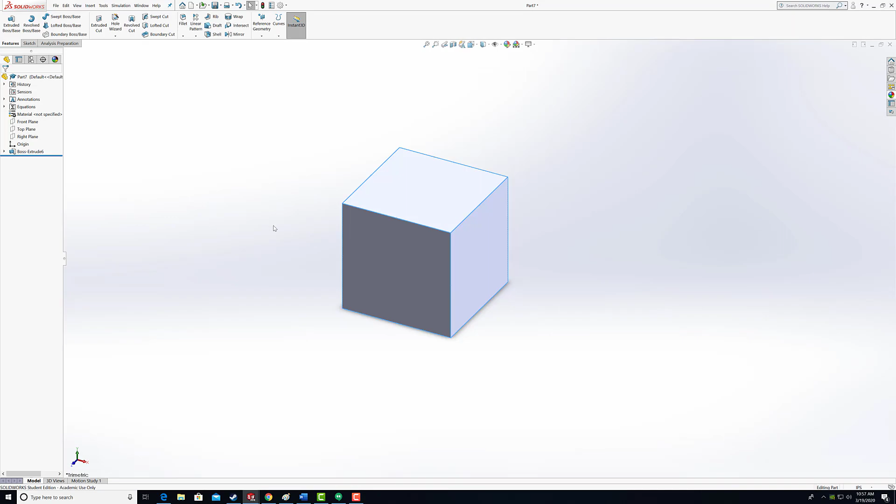Now, as we look at our cube, we need the ability to visualize our end goal, which in this case is a keychain with our name on it. We could go about this a few different ways. We could delete this cube and start from scratch, or a quicker and arguably easier way is to just edit our pre-existing features.

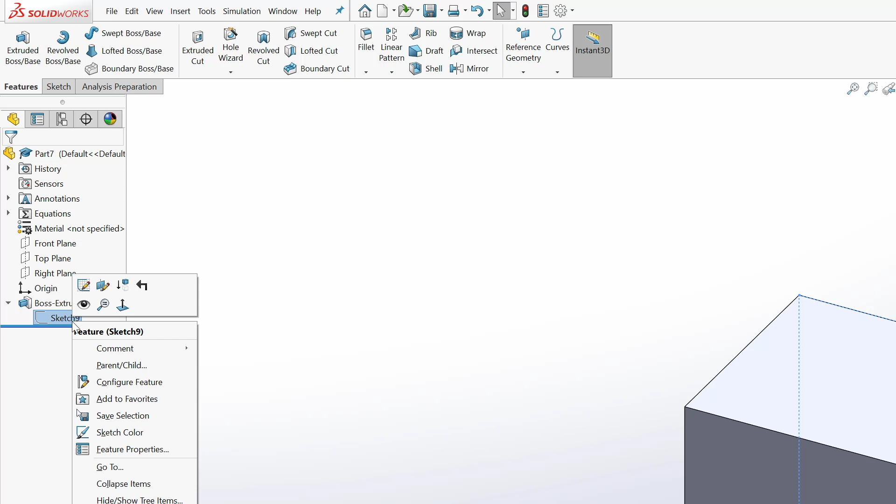To do this, head over to our Boss Extrude in the tree. Remember, we can see all of our sketches and 3D objects within the tree. Clicking the arrow next to the 3D object reveals the corresponding sketch. Right-click the sketch option and click Edit Sketch. Now feel free to hit the space bar, then select Normal To. This brings our view to whichever plane or surface we are currently working on.

Double click on our dimensions to the left, which is our width, and place 2 inches. Now double click our length dimension and enter the new dimension of 5.

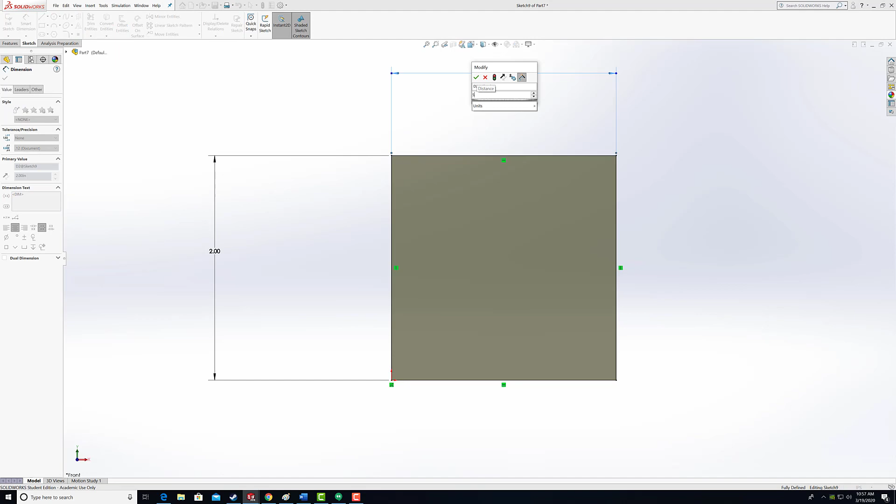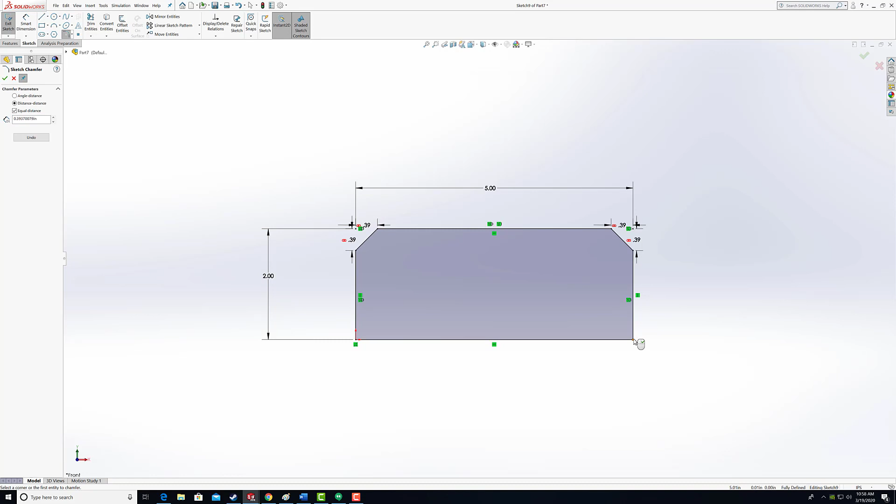Before we leave our sketch, let's add a few chamfers, just to add some interesting geometry. Go up to your sketch tab, and next to the fillet tool you will see an arrow. Let's click that. This reveals the chamfer tool. With the chamfer tool selected, select all the points of our rectangle. Once we are done selecting our 4 points, we can go ahead and click the green check mark.

Perfect. Now you guys can see just by editing this sketch that our original sketch compared to our new sketch is completely different. Feel free to exit the sketch and let's see how this changes our 3D model. Let's go to our ISO view by clicking space, then selecting the solid blue cube.

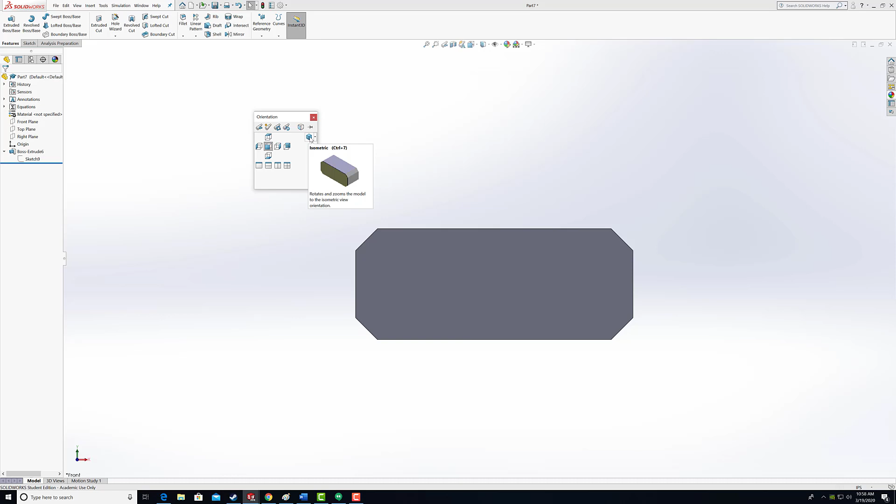It's pretty obvious now that our keychain is way too thick, so let's edit that feature as well. Head back to our extrude in the tree, right click it, then edit feature. Instead of a thickness of 2 inches, go ahead and type 0.25.

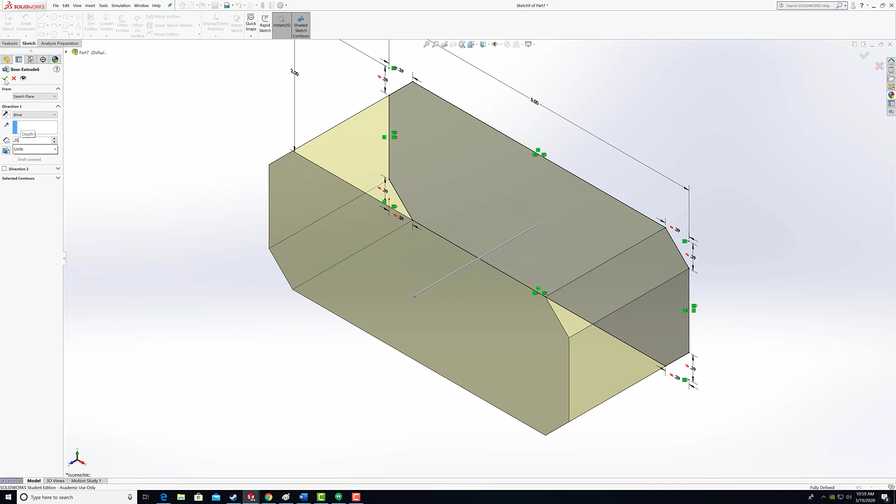Then, check it out. Funny story, I had a teacher where every time we would have to check something out in SolidWorks, he would yell, 'SolidWorks, check it out.'

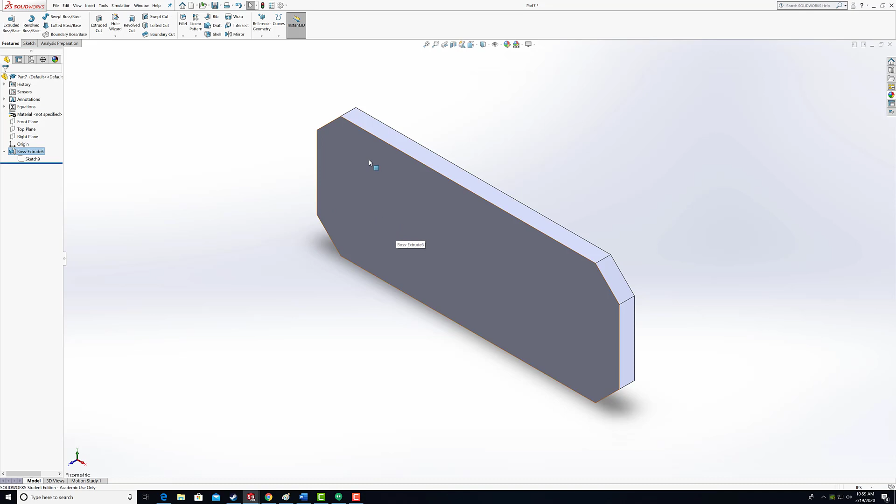Truly an amazing man. Next, we are going to create a sketch on our part's front face. Now, faces are any flat or curved surfaces that a 3D object has, like here, here, here, and here. So let's select the largest face, the front. Left click it and select the sketch option.

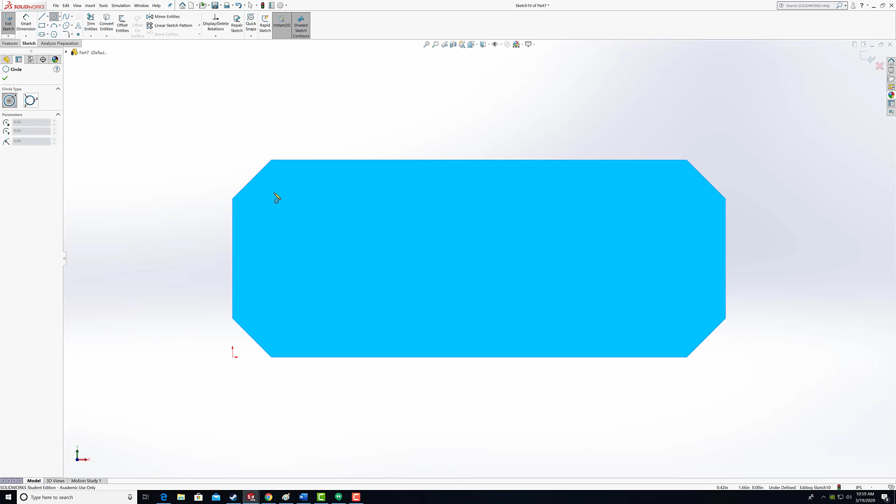Now space and normal to. Notice once more our sketch tab has automatically opened, so we know we are working in a 2D setting. Let's select our circle tool from our ribbon. A circle requires 2 clicks: your first determines its center point, and your second determines its radius. We can of course change all this with future dimensions. So let's select our circle and place it around the top of our part.

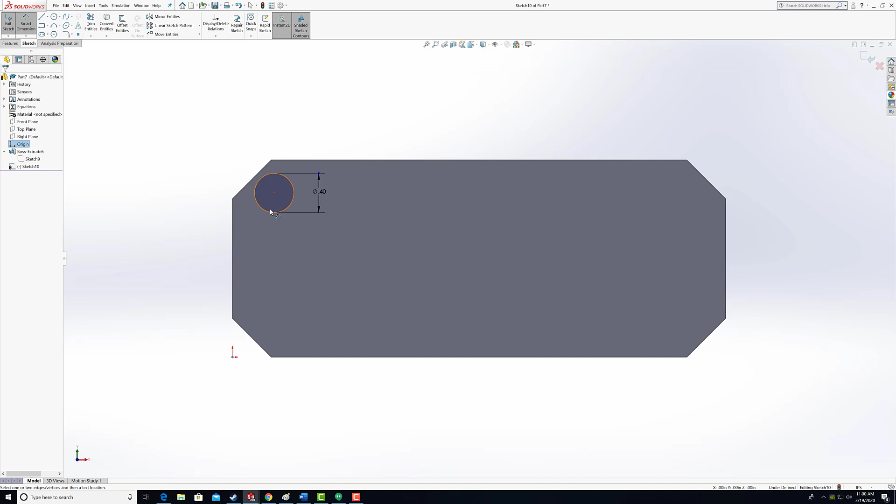Let's determine this circle's diameter with our smart dimensions. Go back up to our sketch tab and click Smart Dimension, then select our circle and add a diameter of 0.40. Now, select the center point of the origin, then the center point of our circle, and drag that dimension down, clicking once more, and add 0.42.

Let's repeat the process, except this time the dimension will be going to our left, and we will set a dimension of 1.6. Let's check this out and head to our Features tab once more. Remember, if you see the words Boss Base, you are adding material, and we want to subtract material. So let's click Extrude Cut.

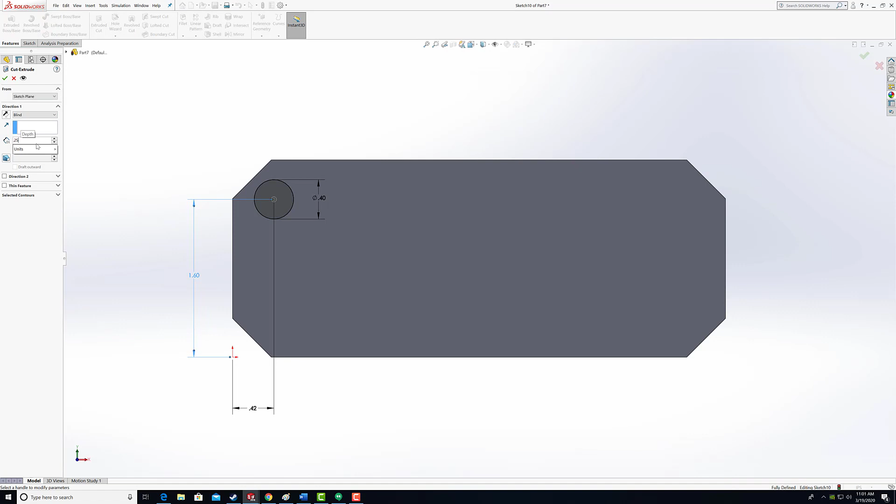Now type in 0.25 and let's check it out. We now have a hole for our keyring. Let's select the front face once more and create a new sketch. So let's select normal to.

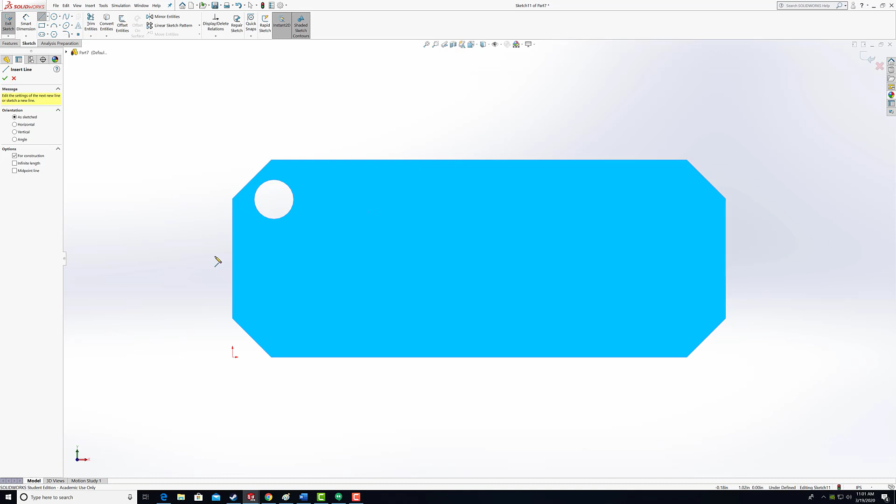Under the line tool, up in our sketch tab, we will select the center line. Now imagine a center line as scaffolding to a building. It's a line of reference that has many uses. The use currently is to give the letters in your name a parameter to follow. Hover your mouse over the left line for a few seconds and you will see a yellow box. This shows where the center point of that particular line is. Select it, then connect it to the other center line.

Let's head back up to our sketch tab and select the text option. This is resembled by an uppercase A. Notice once we select the text icon, how it asks for a curve. That's also asking for the parameters, so let's select our new center line. Now type in your name. My name is Zach, and that's what I'll be typing in.

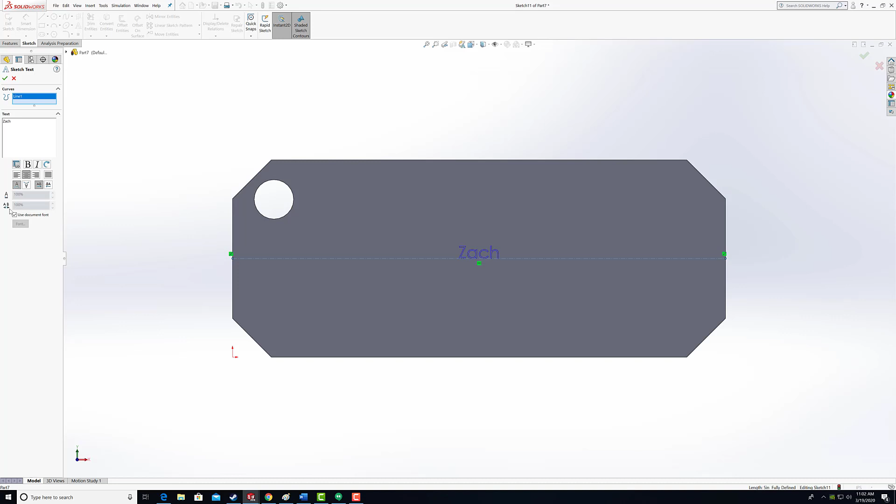If your name is upside down, feel free to mess around with the alignment options. Make sure the middle text option is selected. To make our text larger, let's unselect Use Document font. Now we have access to another option. Let's click the points and try 0.72. However, be sure to pick the best size so your entire name fits within the tag.

Let's check it out, and then let's extrude this. So go to the features and Boss Extrude. Remember, we are adding material. Type in 0.10 for the depth. This is starting to look perfect.

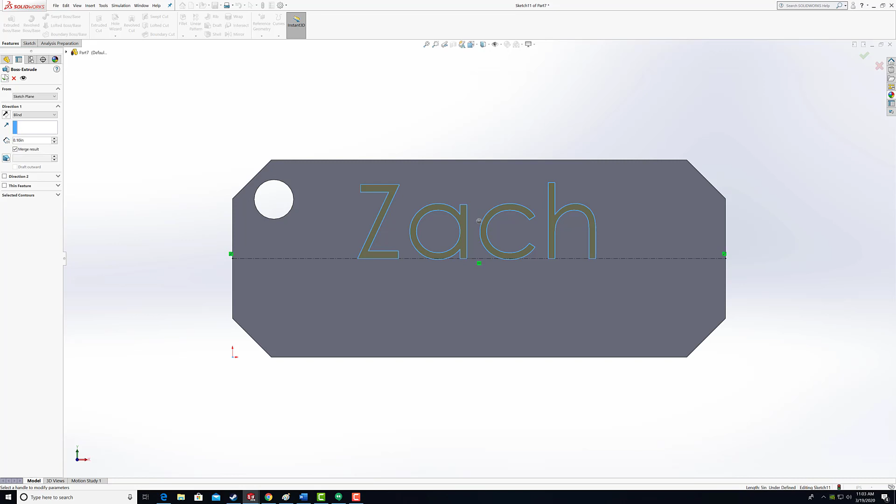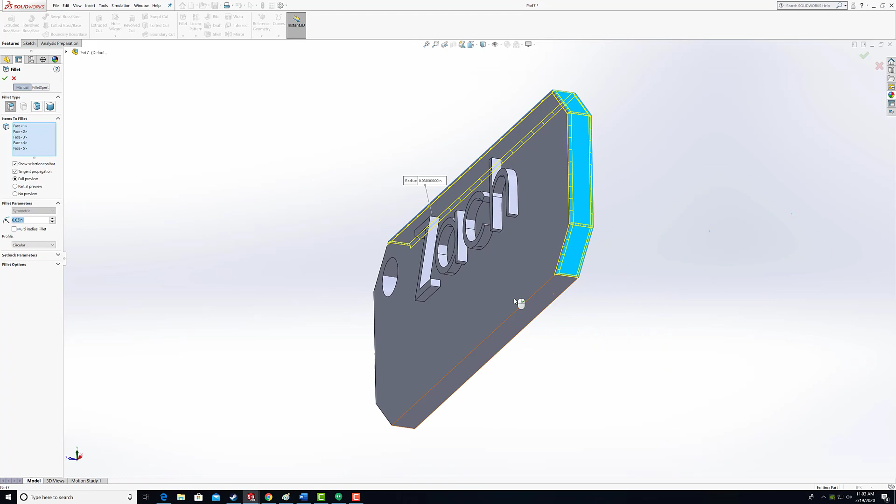Let's add some fillets so the edges aren't so sharp. Under the Features tab, you can see the Fillet tool. Go ahead and select that, and before picking anything on our part, type in 0.03 inches. Then select all the boundary surfaces. Perfect. We have created our new name tag.

This is ready to 3D print or toss into a CAM file to CNC. I will show you how to add that in a next video. Our next video, however, will show you how to edit the parts of this appearance quickly, that is, how to change the color.